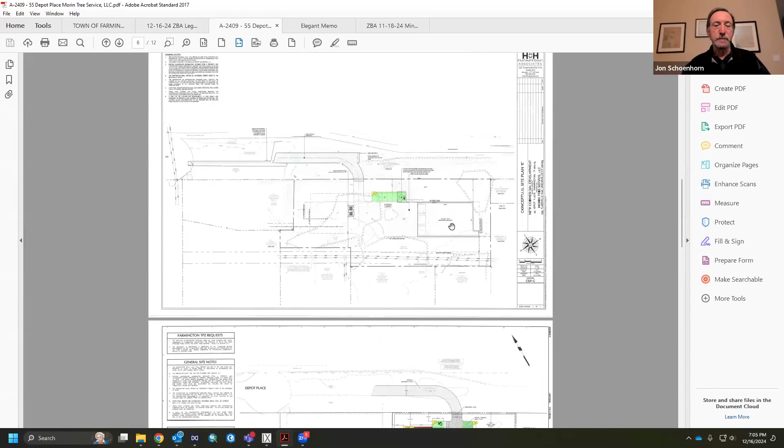I'm going to ask that we now go to the Morin Tree Service application. But before the applicant speaks, I would ask Mr. Daigle if you could just summarize briefly the circumstances that bring this application here, since it is a reapplication of a variance that was previously granted. Sure thing.

The application before the board tonight is for 55 Depot Place. The map currently on the screen is the approval given in 2019 for this property to allow 3 parking spaces, part of the building, and an overhang within the required 40-foot front yard setback for an industrial zone. There's a required landscaping buffer to the rear of the property as it abuts residential properties, which pushes the building forward. The board agreed there was a hardship in 2019 and granted permission for the parking lot, parking spaces, and building to be pushed into that front yard setback. The closest parking spaces were 15 feet from the front property line, and the building was 25 feet.

The property owner has come forward with a revised application to relocate the parking. They're purchasing an adjacent piece of land, which moves the building from within the front yard setback to a completely compliant location, not requiring any variances for the building. Because of the layout of the property, the parking spaces need to be located elsewhere, and that's the application before you tonight: to modify the previously approved variance to relocate the parking. Does anyone have any questions before we turn it over to the applicant?

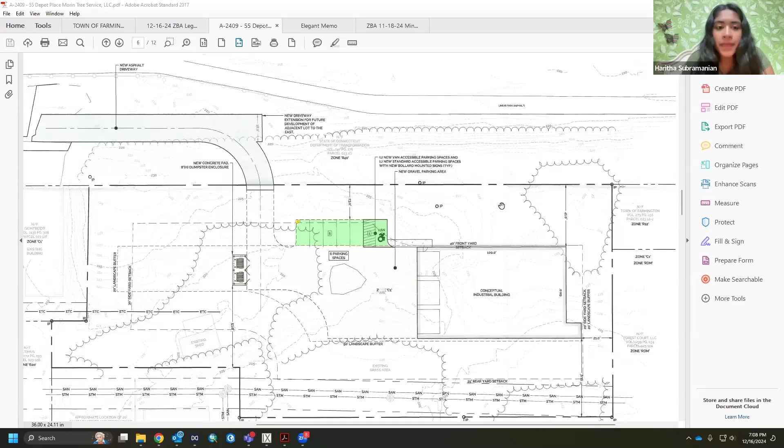Does that make sense? Yes, and the building itself is now compliant. It does not require a variance under the new proposal. Correct. So overall, the area that is non-compliant now, should this application be approved, is less than the non-compliant area beforehand. Correct.

All right, so with that, I'm going to ask the applicant to state his name, address, and explain the reason for the need for this variance.

Chad? Hello, can everyone hear me? Yes. Oh hi, sorry, yeah, I just logged in. I for some reason couldn't hear the beginning of that.

Just state your name and address for the record, and then explain your reason and need for this variance. My name's Chad Morin. I'm looking to get a variance on 55 Depot Place for the parking location. The reason is to push it further away from the residential zone on Forest Street and keep it closer to the C1 zone on Depot Place. So we're just trying to keep the parking away from the residents and maximize buffer space between the two zones.

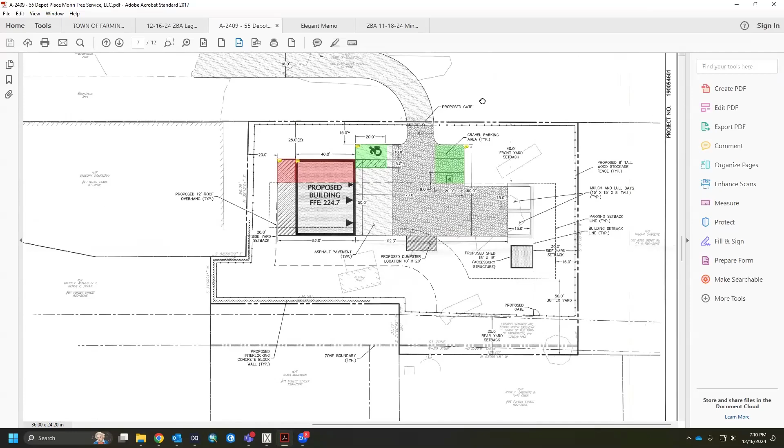Okay, so now I will call on the members of the commission if they have any questions. Was there anything else you want to add before I turn it over to members, Mr. Morin? So yeah, the change I'm making here, I have plans already approved by the town back in 2019 that are associated with 55 Depot Place. The variance I'm going after today is a variance I've already gotten for 55 Depot Place, and again this was back in 2019.

Since I've purchased the lot abutting 55 Depot Place, which is the furthest parcel on Depot, there's no potential for future development anymore. So with the added land, I'm trying to change the site plan again to maximize the distance between the residential and commercial lots there. The location of the building, which is not really up for discussion today, but also the parking location, are done in a way to keep everything as far away from the residential zone as possible, and also to minimize backing vehicles up and moving vehicles inside the lot, just to minimize noise disturbance as much as possible.

I'll just have you also explain, I was one of the commissioners at that 2019 meeting, but many of the members are new. So just explain briefly what kind of business you operate and why keeping the buffer distance from the residential neighborhood might make this a hardship that is worth considering.

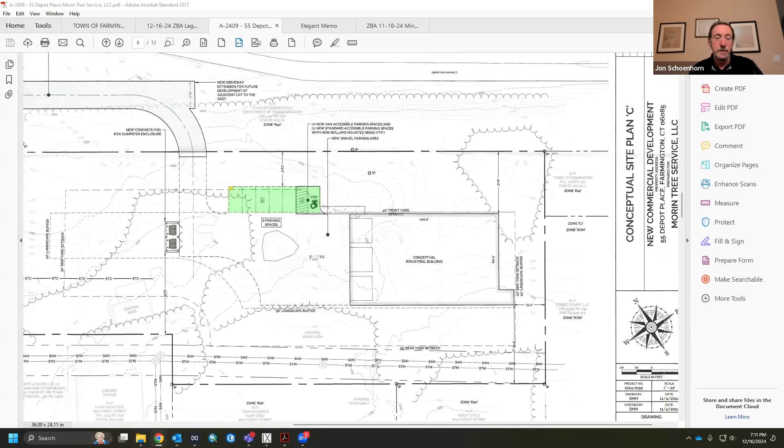So one of the challenges with this lot is the width of it, though it's plenty wide enough for me. I have a tree service here in town, a second generation arborist. We're a small business, but we do have trucks, and the turning radius on it isn't tremendous. So by putting the parking in the location I'm looking to put it, it will minimize the amount of times we have to turn around, and by putting vehicles there, they're essentially facing their way out. Since this is the end of Depot Place, every vehicle that comes into the lot has to retreat backwards towards Plainville Ave in order to get out of Depot Place.

The tree service I have, some of it is hazard work, especially this time of year in the winter, so sometimes there's storm response, sometimes early mornings. I'd like to have everything ready to go as much as possible, not having to move trucks around and make unnecessary noise. The plan I have approved from 2019, which shows the building and parking in another location, basically requires me to do a 3-point turn every time I want to leave my lot, because the doors facing the opposite way require trucks to swing all the way 180 around. So by turning it, we'll have everything pretty much ready to go, and it'll be a much smoother operation. I think everyone will be happier with it.

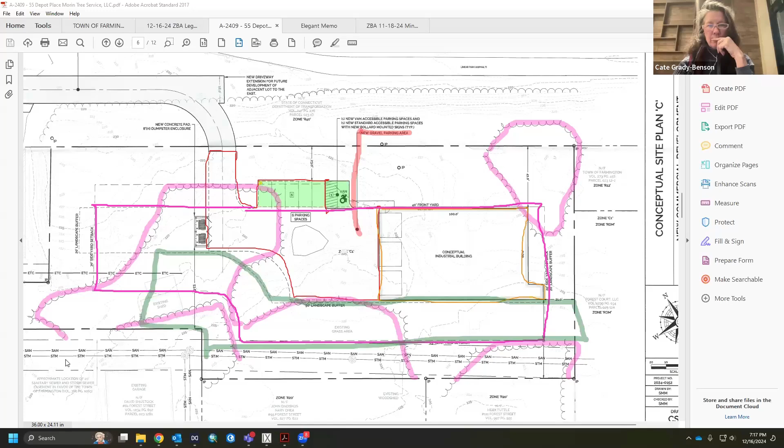Do you have any other questions, Commissioner Grady Benson, or no? One last thing, is that parking area you're proposing, Mr. Morin, gonna be gravel there for the public? I believe so, yes, or concrete asphalt millings or a material like that. Except the only change would be that the accessible parking space and accessway has to be paved, similar to what the land trust had to do. Yes, so you've got the gravel parking lot, but the paved accessible spaces. Right, thank you.

Commissioner Jemski, no questions, thank you. Commissioner Cloud?

Yeah, I do actually, Mr. Chairman. You mentioned earlier that one of the challenges is a 3-point turn. So walk me through in this new design, won't you still have to do some of that? Or is the plan that the trucks go in face forward, or do they reverse up to the back portion of the building? How does that work?

This question is to Chad. Chad, are you with us? Mr. Morin, are you still there? We seem to have lost him, he's still logged in. Can we ask him to turn on his video so we can see him? Is that possible? Hi, sorry, I'm having trouble with my connection here, for some reason it's tuning in and out. Can you still hear me? Yes, but one of the commissioners asked if you can turn your video on too, do you have video there?

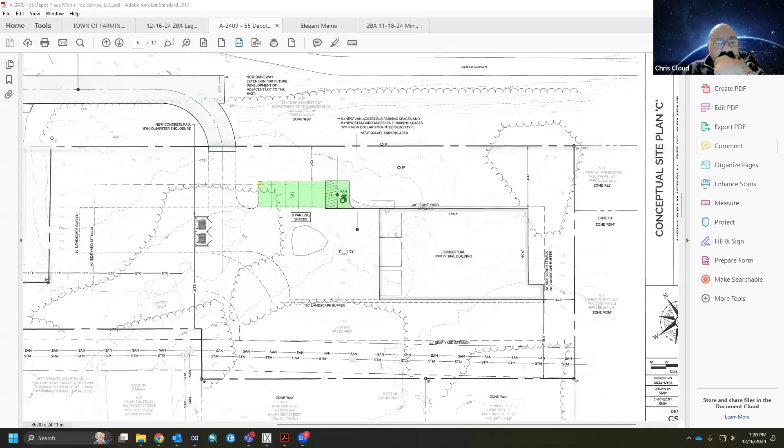Again, for the record, we seem to have lost the audio with Mr. Morin. Can you hear us, Mr. Morin? Hold on one second, he seems to be having some trouble. I'm hearing something that sounds like signal interference, so I'm wondering if he has a weak signal.

Give me one, hold on one moment, Mr. Chairman.

We can do maybe, if you can type, and then I can read it out loud. Let's try that at least.

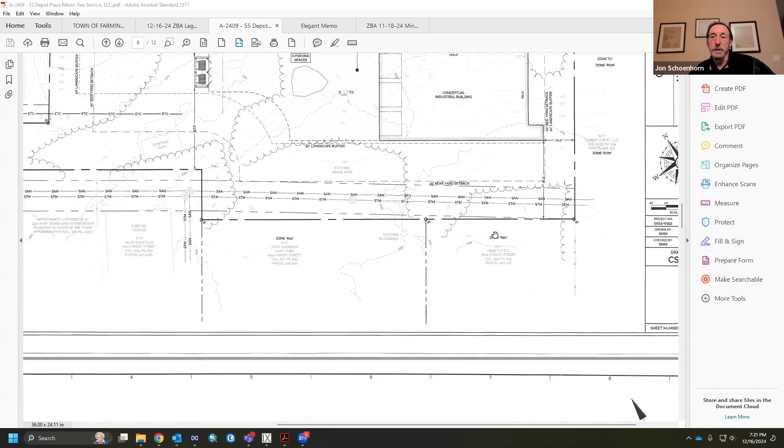Is he still logged in though? Yes, he's still logged in, so I can still see his name, and he's able to send a message. Can everyone hear me? Yes, we can hear you now. Oh hi, yeah you're good. Sorry, it keeps tuning in and out.

Do you recall what the question was, Mr. Morin? About whether you would have had to do a 3-point turn, a K turn anyway, or are you planning on having the trucks back up to the building? That was the question, if I'm phrasing it correctly, from Commissioner Cloud.

And I think you put your microphone on mute. It looks like you've muted yourself.

Mr. Morin: No, not required with this plan. Trucks will swing around and back into the building, ready to leave straight daily.

So I believe what Mr. Morin is saying is the trucks will come in, pull in here, and back into the building, as opposed to the old plan where the trucks would pull in and back out and pull out. There's more room with the parking lot because this area is 60 feet wide compared to 50 feet, 50-ish, a little less than 50 feet we'll say.

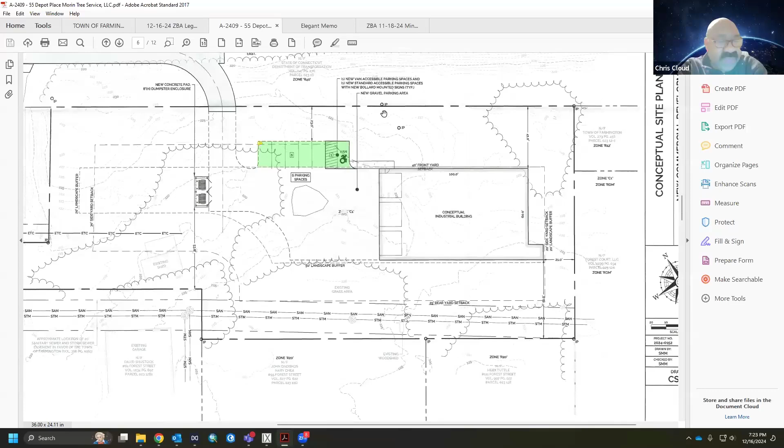Okay, any other questions, Mr. Cloud? No, that answers my question. I'm sorry we had to be tortured through that, but I'm good. All right, Commissioner Callahan? No questions.

All right, and I just have a couple, and I don't know if Mr. Morin can either speak or he can type. My recollection from 2019 is you were going to store certain material on the property, like wood chips or logs and whatnot from your tree service. Are you still planning to use your property for that purpose?

One minute, Mr. Chairman.

He says yes, they're not shown on the plan, but any material storage would have to be outside the landscape buffer. So the only location would be here, or if the dumpsters were relocated elsewhere, it would be here.

All right, so in other words, to be clear, none of that material is going to be stored near the buffer, which is closer to the property owners in the residential neighborhood on Forest Street.

Correct. Okay, let me, can I, hold on, okay I gotta... so here was the original location for the bins on the old plan. Right, let me change that color, sorry about that.

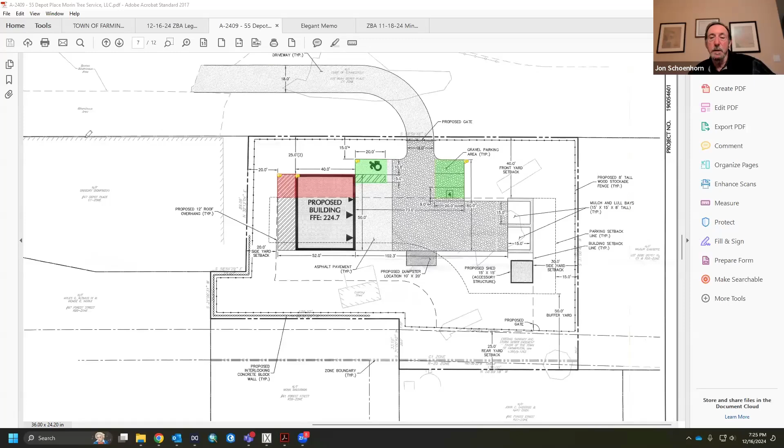Okay, I understand. And my last question, do you anticipate doing a regular amount of wood chipping or chainsawing of the logs and wood material at this location as part of your business?

Hold on one minute, Mr. Chairman.

Chipping occasionally on site, but not normal activity.

And just for the record, Mr. Chairman, I think it was in the agenda review as well, but Mr. Morin will also require site plan and special permit approval from the Planning and Zoning Commission, which would govern hours of operation and exact function of the site within the setbacks, outside of the setbacks. So the general construction area would be governed by the Planning and Zoning Commission. Excellent, okay, that was good to know.

All right, so Mr. Morin, and again, I understand there's technical difficulties with your audio here, but is there anything else you would want to add before I open it up to see if anyone online wants to remark?

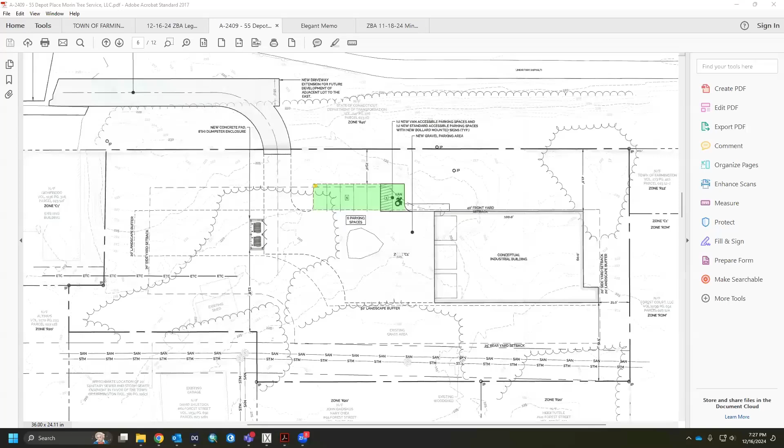I'm just wondering, can we ask questions about things that they're doing on the property? Of course you can. What would be the relevant question? Well, it would be within our purview? It would be my decision as chair whether it's pertinent or not, and I have a very broad view of what's pertinent. So what's your question?

I just wanted to know if that's within our purview. Yeah, you can ask. It just can't necessarily be part of any restrictions, couldn't really be part of a motion, because it's not a variance for the use. It's not a variance for the building.

Everything outside the setback area would fall under the regular zoning regulations that a variance is not being sought for. It would fall under our industrial zoning regulation. Within that setback area, everything outside that needs approval from the ZBA, but if you have a question, we can certainly answer it.

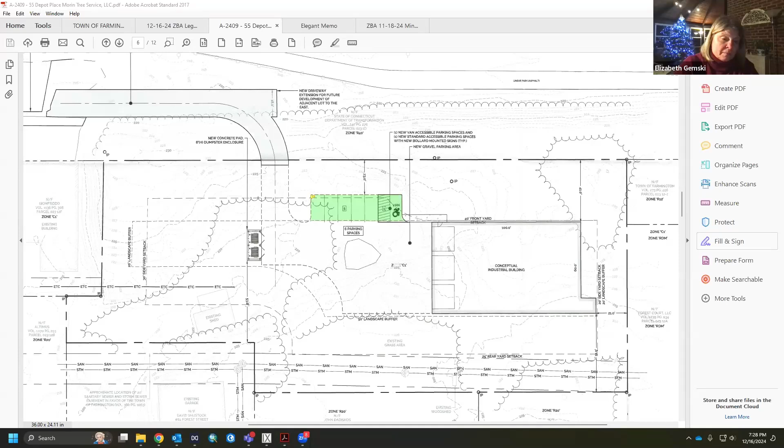Okay, thank you. So do you have any such question or no? No, I don't. I'm good. Okay. Mr. Morin has nothing else to add before the public hearing opens.

Sorry. Okay, so now I'm going to turn to members of the public. The way we usually do this is if people want to speak in favor of the application, they raise their hand first, and then we will hear from people who wish to speak either neutrally or opposed to the applicant.

If anyone from the public has called in to speak in favor of the application, please use the raise hand function in Zoom. Mr. Chairman, there are no hands raised.

If you're all set, I'll move on to any opposition. If anyone has any objection to the variance request, please use the raise hand function in Zoom. Mr. Chairman, there are no hands raised.

All right, was there any correspondence with regard to this application? There was none. I didn't even get a phone call. Okay, well, with that, then I'm going to close the public hearing, and I will entertain a motion from members of the commission.

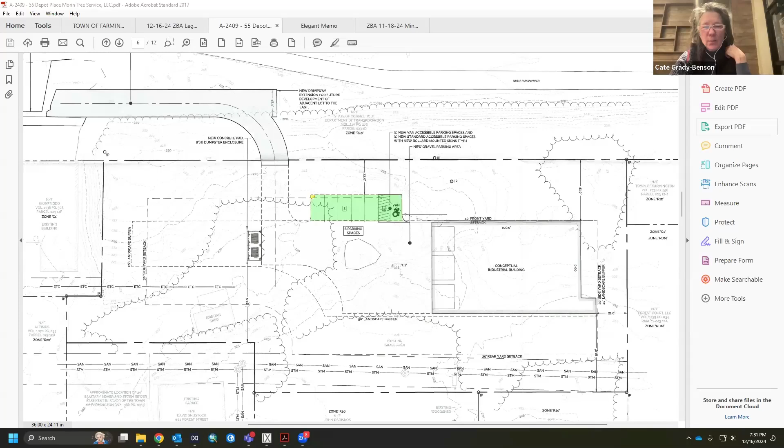I will just add that I agree with what Commissioner Grady Benson just said. It's actually, in my view, less of an extension or variance from what was previously presented, in that before we had approved a building outside of the setback. These are some parking spaces which may or may not be in use all the time, but it certainly has less detrimental effect on the location. I don't believe it will in any way interfere with the zone, and it doesn't change the character of that commercial industrial zone. So I will also agree.

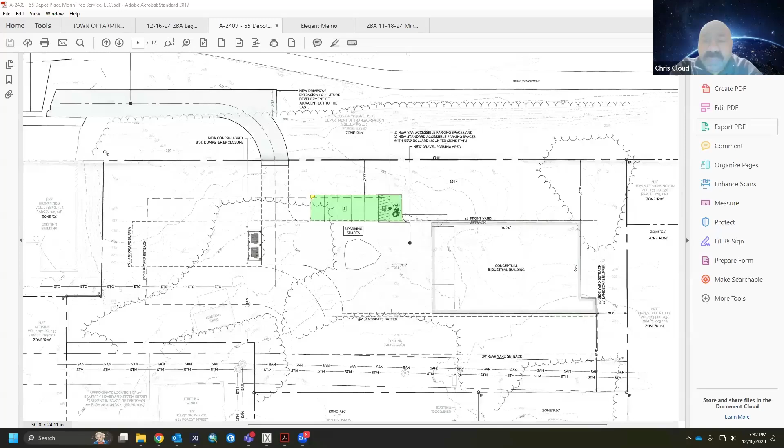Does anyone else have anything to say before we call the roll? No. Okay, then Mr. Daigle, would you please call the roll? Certainly, Mr. Chairman. Commissioner Grady Benson, Approve. Commissioner Cloud, Aye. Commissioner Walsh, Approve. Commissioner Callahan, Aye. Commissioner Gemski, Yes. and Chairman Schoenhorn, Aye. All right, that is 6 ayes.

The motion passes. Variance is approved. All right, so Mr. Morin, you'll work with the town. You know the drill from last time. They will publish the notice before you can get to work on your plan.

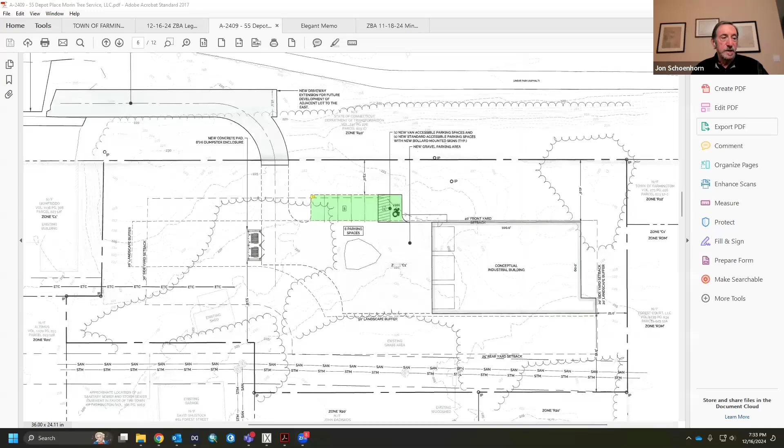All right, the only other item on today's agenda is the approval of the November 18th minutes. Could I have a motion with regard to the November 18th, 2024 minutes? I make a motion to approve the November 18 minutes. Second. And who seconded? Commissioner Liz.

Okay. All in favor? Aye. Aye. Anyone opposed? Okay, then that takes care of tonight's agenda, so I'm going to entertain a motion to adjourn.

Next meeting, Mr. Chairman? Yep, I was just going to say, if you don't mind, our next meeting is scheduled for Tuesday, January 21st, because of Martin Luther King Day. I'm expecting an application possibly, but the deadline is New Year's Eve. So if I don't get an application by then, I'll let everyone know.